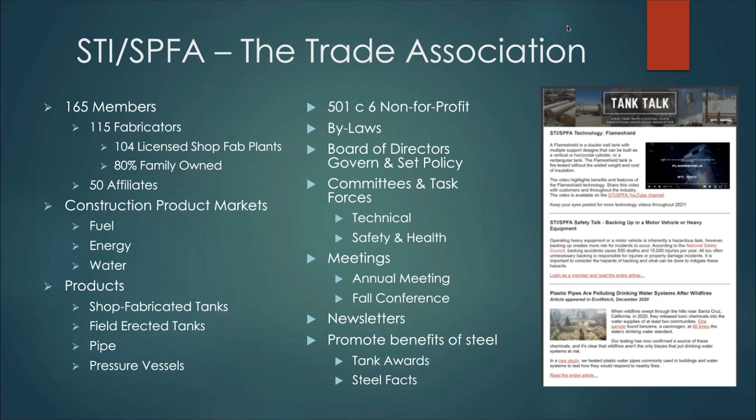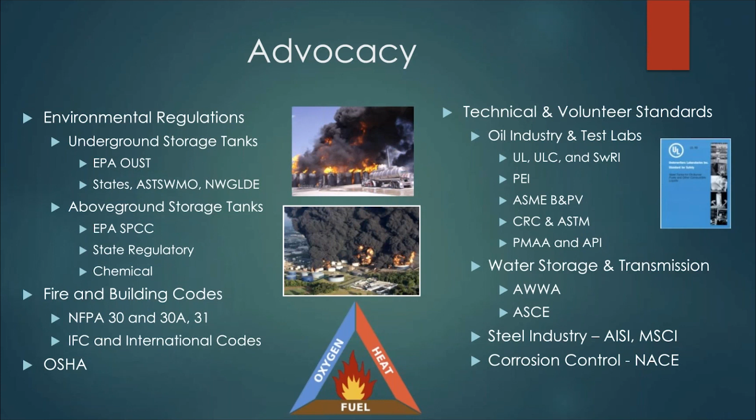Their customers are from a number of different industries, including petrochemical, power generation, food, pharmaceutical, fuels, wastewater, and water transmission industries. STI-SPFA is recognized for its industry advocacy. Our members and committees participate in and work with several federal and state regulatory agencies such as the EPA, the National Fire Protection Association, and OSHA. We also maintain relationships with other industry and related organizations, including API, PEI, ASTM, AISI, and MSCI.

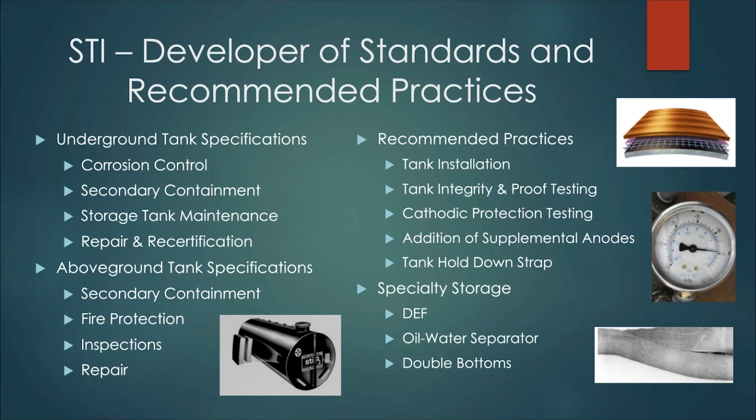STI-SPFA members contribute to several industry standards. Our members are actively engaged in the development of underground and above-ground tank specifications and recommended practices for installation, integrity, and testing. STI-SPFA is a hub for resources for our members, their customers, and the industry at large. Through our website, steeltank.com, we provide valuable information and keep our members up to date on the latest industry news, trends, and technologies. The association provides steel fact sheets and other beneficial information to demonstrate the strength, sustainability, and compatibility of steel.

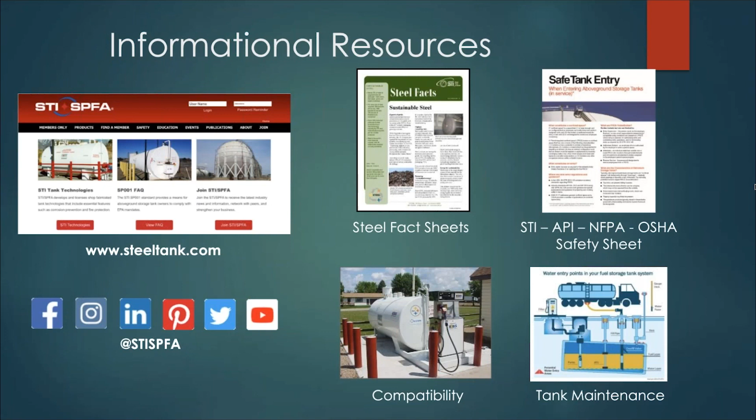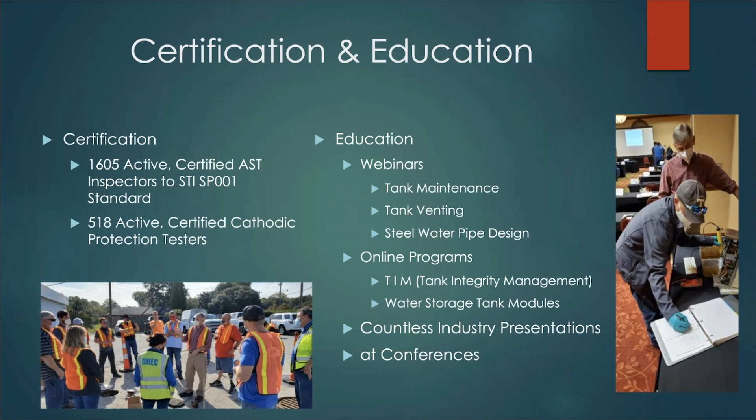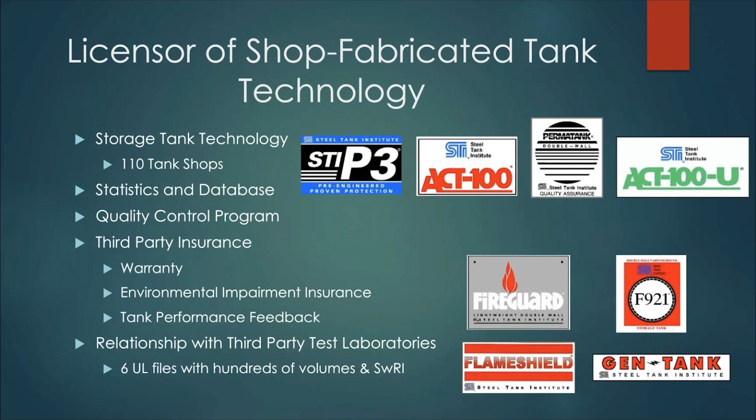STI-SPFA is the recognized source for training and certification in SP001 and cathodic protection. Recognizing that all tanks require ongoing maintenance, STI-SPFA also provides education on tank maintenance, including an online certificate in tank integrity management. STI-SPFA develops, licenses, and updates shop fabricated tank technologies for both underground and above ground storage tanks. Technologies include essential functions such as corrosion prevention, secondary containment, monitoring capacity, and fire protection.

Member fabricators of our licensed tank technologies are subject to periodic unannounced inspections by a team of STI-SPFA quality control inspectors. These inspectors conduct a rigorous investigation of the manufacturing function at tank fabricator facilities to ensure that companies are complying with the standards and specifications for manufacturing each licensed technology. Each member fabricator making STI tanks is required to send at least one representative to our biennial quality control meeting. Today, over 100 STI shop fabricated tank facilities are inspected, with an average of 5 STI technologies licensed per shop. More than 450,000 tanks have been built to STI specifications.

STI-SPFA members' customers are assured of the highest quality in the manufacturing of Steel Tank Institute licensed tank technologies from the Quality Control Program. STI-SPFA has also conducted several research studies and developed technical papers on a variety of topics, including tank design, steel compatibility with various fuels, including ethanol and biodiesel, and corrosion prevention and cathodic protection testing. Additionally, STI-SPFA has designed software and spreadsheets to address structural concerns and provide engineering calculations.

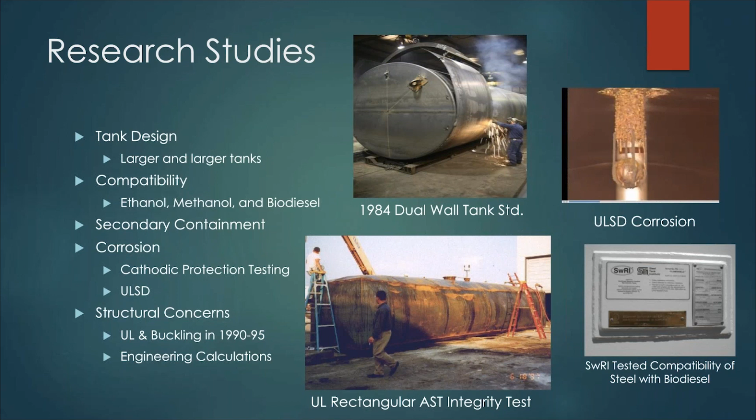I'd like to introduce you to our presenters. Wayne Geyer, who served as Executive Vice President of STI-SPFA for over 30 years. Steve Pollack, STI-SPFA's Director of Technical Services. And Joe Menser, STI-SPFA's Standards Engineer. Without further ado, Wayne Geyer will kick off our discussion on the history of underground storage tanks.

Thank you, Tim. The history of underground storage tanks goes back quite a few years. Just to get a little better background, oil was discovered back in 1859, and the first code requirements were in 1904, which was the predecessor to the NFPA 30 flammable combustible liquid codes as we know today. In 1916, the Steel Tank Institute was formed. The letter you see there with the heading Kewanee Boiler Company is a letter shared by a number of fabricators in the Midwest that decided to form the Steel Tank Institute. Two of those companies are still in existence today and are still members of the Steel Tank Institute: the Chicago Boiler Works, now called the Chicago Boiler Company, in a suburb of Chicago, and Morrison Brothers in Dubuque, Iowa.

The American Petroleum Institute formed 3 years after STI, and then the first formation of standards for steel storage tanks storing flammable combustible liquids occurred with the Underwriters Laboratories UL 142 standard in 1922. That means we're at 99 years for that standard. And in 1925, the first standard for underground steel storage tanks for flammable combustible liquids was developed in the UL 58 standard. Then you see about 40 years before further standards came upon the scene, and this dealt with corrosion control for underground tanks.

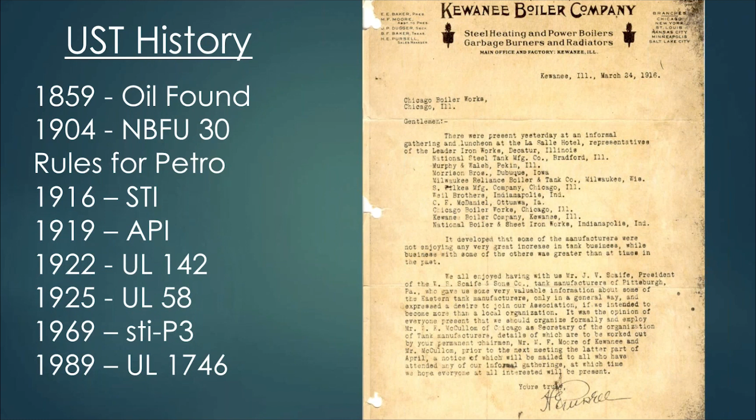In 1969, the Steel Tank Institute, through 9 fabricators, formed the STI P3 underground storage tank standard, which we'll be talking about in a little bit. And then 20 years after that, 1 year after EPA promulgated regulations for underground storage tanks, UL published their 1746 standard for corrosion protection of underground steel storage tanks.

It's also important when we consider the history with the development of standards for underground storage tanks to be aware of some of the other technological developments that were taking place. First, let's go back to why all of a sudden there was the need for storage of petroleum, petrol, fuel oil, gas, whatever you want to call it, in the early 1900s.

Lincoln Electric invented the first welding machine in 1907, when we look just at the welding history. And interestingly enough, the Model T that Ford created was built from 1908 to 1927, and there were about 15 million of those built. But it's basically a luxury type vehicle that basically the rich could afford. It was not a commodity yet at that point.

The welding further developed. The first pipeline got put together in Oklahoma in 1914. The American Welding Society formed in 1919. Various electrodes developed in the 1920s. The boiler and pressure vessel code in 1925. And a real popular weld procedure, submerged arc, 1930.

The point of all this is there was welding in the early 1900s, but it really did not advance where it could be used to build production for storage tanks until some 20-some years later, 1930s. 1920s was the UL standard. And then there were further developments, as you see there, in the 30s and 40s.

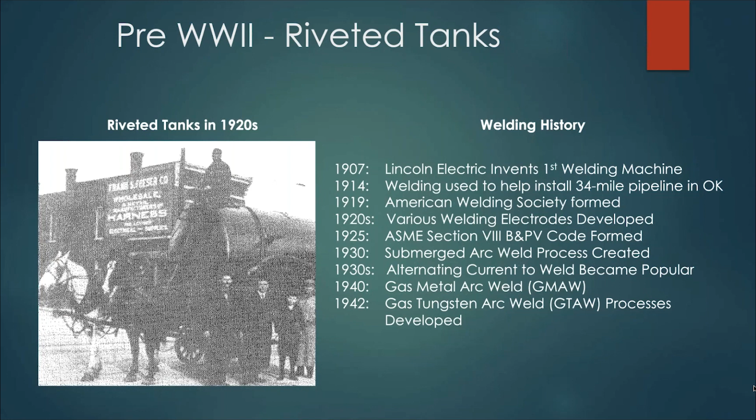When I go back in the Steel Tank Institute files, I really don't see a lot of further standardization until the 1950s. And the Midwest 56 standard was a standard built and developed by both the steel tank fabricators and the oil companies. They wanted to standardize the size of the fittings on an underground tank and the location of those fittings so that things like fill lines, vent lines, and so forth could be connected and standardized at the petrol stations that were popping up all over the country at that time after World War II.

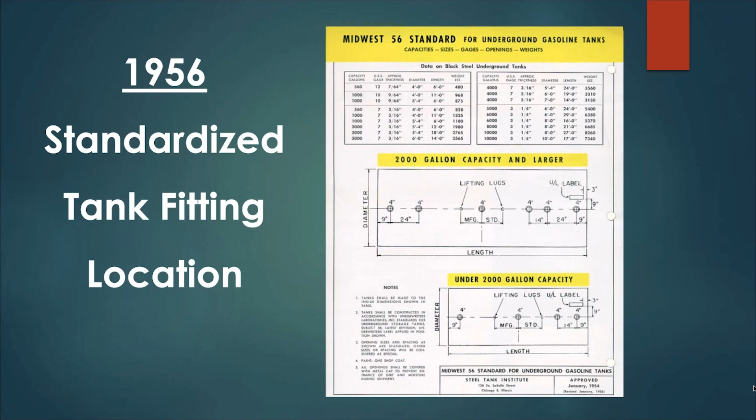You can see there that the tank sizes were pretty small by today's standards. Today we might see underground tanks of 20,000 gallons, 30,000 gallons being put in, some with compartments. Back then, 2,000 gallon, 4,000 gallon was a popular size.

In the 1960s, this was still before the environmental movement, the oil companies started experiencing corrosion from steel storage tanks being put in the ground which did not have corrosion protection. At that same time in the 60s, the oil companies were looking at it more as money out of their pocket, their inventory, and as I said before, it wasn't an environmental issue as it is today. So there were a number of efforts being made by the steel tank industry as well as the oil companies to find tanks that could go in the ground that were corrosion resistant.

One of those studies was with a non-metallic fiberglass structural tank that Owens Corning was developing. The steel industry experimented with a couple things. One was just a plastic baggie that you can see here in this photo. This photo is in the 60s. You can see the very, very sophisticated joining technique, that duct tape there.

This was apparently before OSHA rules were too evident, because that fellow there almost looks like he has a cigarette in his mouth. It's pretty darn tight between the wall of the excavation and the tank, and the other fellow is laying across the tank. Clearly not acceptable installation standards today. But believe it or not, some of those baggie tanks actually came out of the ground in the 80s and 90s, and where there was not much groundwater around and the tape was sealing that plastic, it did a nice job of providing corrosion protection.

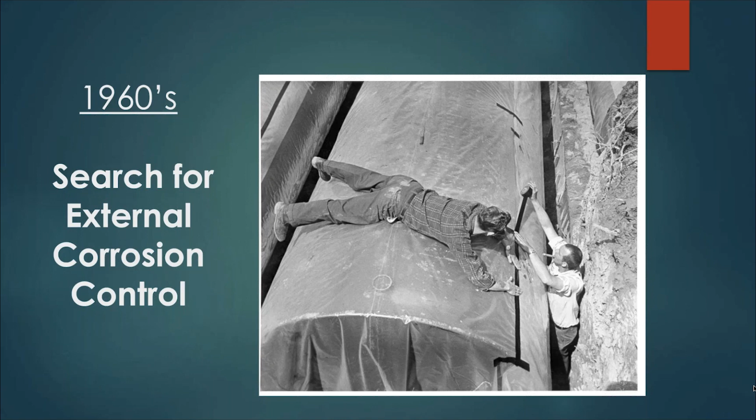Now, there are not too many of them because the tape generally didn't last that long. But there was a company in Michigan in those days, and they actually commercialized and sold a package called Polywrap, or a polyethylene wrap over the tank, as you see there.

There were a couple other systems that the Steel Tank Institute and its members were investigating. One was use of FRP coatings. As I said before, Owens Corning was developing a fiberglass tank, and the steel industry thought, well, maybe we can use that FRP, fiberglass reinforced plastic, as a coating. This was actually a standard developed by STI called STI-LIFE back in 1968, and it was actually the first technology where STI had a labeling system that was applied on the tank. You can see there the demonstration with a sledgehammer to show the coating was pretty tough.

And some fabricators stuck with the fiberglassing for the next couple decades before a new standard came out called the ACT-100. But putting a fiberglass coated tank together was not easy. There was a lot of hand-applied requirements. The aesthetics weren't necessarily great, and the cost was great.

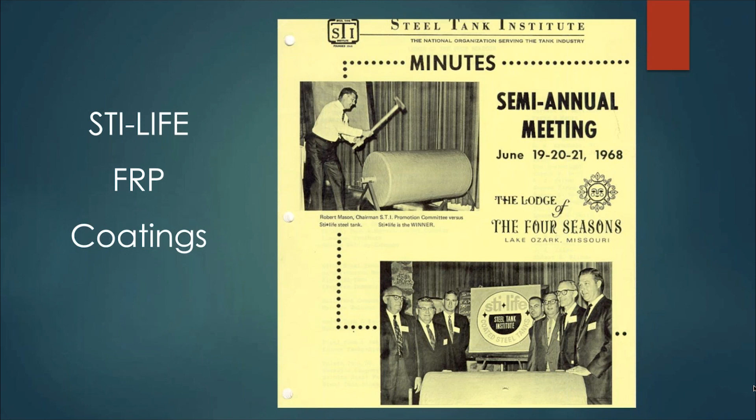So one other system that was being tested was a cathodically protected system. And this system was called the STI P3, where P stood for the word proven protection in 3 ways. The 3 ways were through a dielectric coating, a magnesium anode, and separation between the steel tank and steel pipe through something like a nylon bushing, where the steel pipe and steel tank didn't touch one another.

I talked about the development of welding through the years. One of the big advancements that allowed the STI P3 tank to become successful was with coatings. Up until this time, underground tanks were just coated with a primer, asphaltum coating, that was basically to prevent the tank from corroding while it was being shipped or stored in the yard or stored at the job site before it went in the ground. People didn't really understand that groundwater and soil could have a corrosive effect on steel.

As coatings progressed, that soon got replaced with the STI P3, which necessitated the use of a high-tech coating at that point called coal tar epoxy. Later, that coal tar epoxy became replaced by another coating in the early 80s called polyurethane, which was a much more productive tank coating to be applied because it could be applied and cured in an hour, where coal tar epoxy took maybe a day for it to harden up, and there were also some solvents in it.

You see here the STI P3 tank was being shown to some potential buyers who were learning how a steel tank could be prevented from corrosion through this great system called the STI P3. At that time, a standard was created in 1969 with the first tanks in 1970. As I said before, 9 companies and 9 fabricators started promoting it.

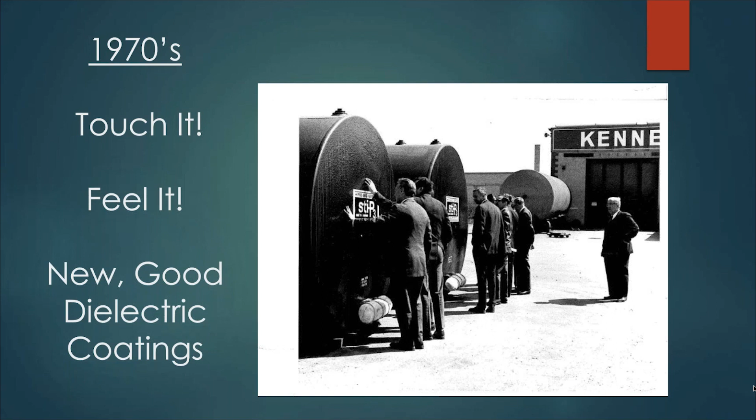The oil companies wanted a national effort on this, so the Steel Tank Institute agreed to take it over and apply a 20-year warranty to it as requested by the oil companies. And the system had a labeling process and an inspection process, which STI did to verify the tank met the standard. You'll see some more pictures here, and rather than myself go into detail, I'm going to turn this over to Steve Pollack, the Director of Technical Services for Steel Tank Institute.

Thank you so much, Wayne. I appreciate the history leading up to these tanks, and what I'll talk about from here on is a bit about what you mentioned, the 1988 promulgated federal regulations and the designs that go in to meet these. As Wayne mentioned, the tank construction was modernized, coatings became modernized. This slide lets you know that, again, you're looking at the three ways of protection there.

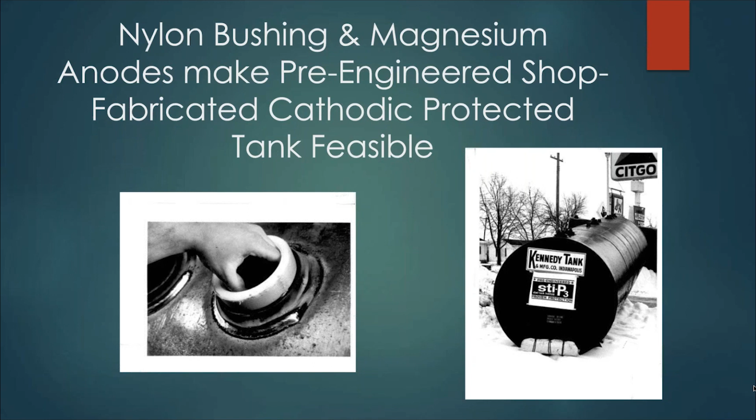There's a coating on the tank, there's sacrificial anodes, and you can see the installation of a nylon bushing into the top fittings. Those are important for making sure that any of the other tank appurtenances on top do not short out the tank and basically have the sacrificial anode trying to protect more steel if somebody connects a steel vent pipe or previously steel piping or is connected to a submersible pump. So nylon bushings are a very important part of that isolation.

More innovations were encountered over the years, and we're very proud of what we worked on. In 1979, cathodic protection test stations were developed. You may have come across these out in the field and heard references to PP3 or PP4 test stations.

The idea was to make the testing simpler for owners, even with the voltmeter and having that connection to the steel of the tank and a buried reference cell. Wayne had mentioned the urethane coatings. Those came on in 1981 and were an important aspect of improving on our coating systems.

One of the things that did come about based on installer experience was that it became important to weld the anodes onto the tanks. The anodes used to be shipped separately, and part of the installation instructions required that the person in the field had to wire the tanks on, attach the anodes onto the tanks, and that was not being done consistently. So we decided that welding the anodes on was a better development.

In 1984, we also looked at dual wall technology, and double wall tanks with interstitial monitoring was developed. And Wayne mentioned another coating development too. We did look at FRP coatings on these tanks. So as secondary containment was developed, and of course now we know that secondary containment is the rule of the land based on the 2005 Energy Act and the regulations that were promulgated in 2015, but double-walled tanks have been around for a long time.

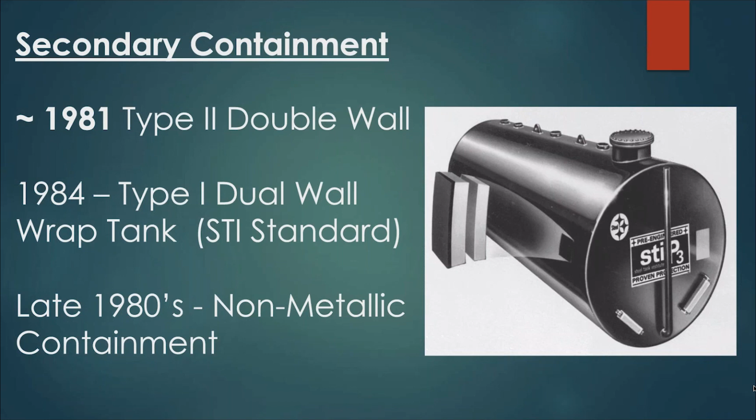Europe had been working with a technique that was more of 100% containment instead of 110, and was an intimate marriage of the secondary wall to the primary wall. The Type 1 tanks came through and were adopted in the mid-80s, 1984. We were working with a Type 1 dual wall wrap tank, and that fits STI standard as well as UL standards. In the late 80s, of course, we started working with jacketed tanks, and that became part of what we work with more now. We'll look at that at the next slide.

One of the other components that we looked at in the mid 80s as a unique addition to these tanks was fitting all of the fittings into one containment sump. And you can see there's a P3 tank with a collar around all the fittings, and what you might not be able to see is that collar is coated. And of course, the rest of that containment sump has to come up to grade.

Again, we're talking about preventing corrosion with coatings and anodes and with isolation. So to complete that containment sump up to grade, we still had to include an isolation around that collar and isolating link seals to connect what would be the rest of a steel sump all the way up to the top of the grade of the tank. Now, plastic sumps and fiberglass sumps came out a little bit later. These steel containment sumps were obviously heavy and hard to work with. You probably won't run into these very often, but that was one of the unique innovations that we looked at in the mid-80s.

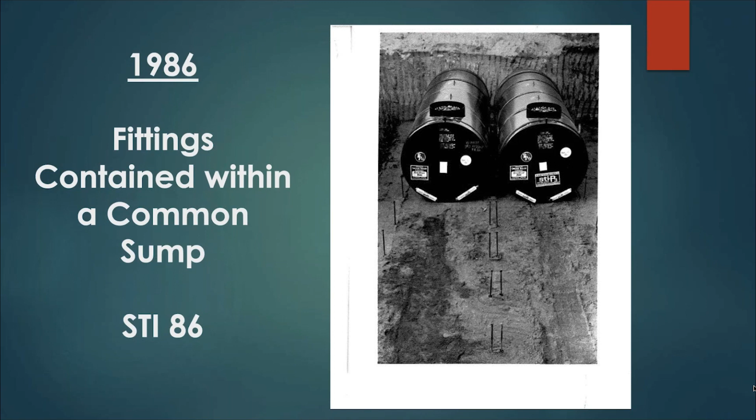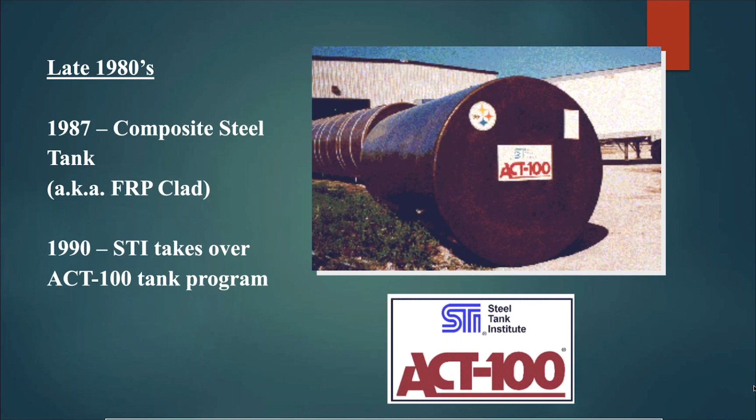The formal notion of a composite tank came with manufacturers who developed the Association of Composite Tanks and developed what we know as the ACT-100 tank. Most of those members of ACT were also Steel Tank Institute members. And after that, the ACT FRP clad tank was developed formally in 1987. STI took over that technology in 1990, and the ACT-100 tanks are still produced today.

So in 1991, the next development was an FRP jacketed tank. You may see these as our Permatank technology. Again, this is a tank that, even though it's from the 1990s, is acceptable even now as our secondary containment rules take place across the nation. This is a steel tank with a close to intimate wrap fiberglass material sprayed on, and that allows for interstitial monitoring of the interstitial space. And this has been one of our more successful tanks and produced across the nation and the world.

Our standards engineer, Joe Mentzer, is going to talk about above ground storage tanks in the next session. Thank you, Steve. We've been discussing underground tanks, and we can also include above ground tanks in this discussion. Above ground tanks actually predate the underground units. However, they were limited in use due to regulations that require them to be separated from people's residences, and also the requirements to provide containment caused problems. But in the early 1990s, some design options became available that addressed those.

One of those was the creation of a double wall tank using similar technology as with the underground tank, but that double wall tank system provided the necessary secondary containment for the tank system. And then the next one was the introduction of insulated tanks, or tanks that had an insulation system incorporated in them that allowed them to be placed closer to people or businesses because the tanks could withstand some minimal exposure to heat. This increased opportunities to use above ground tanks, and there was sort of a feeling among the industry to get away from some underground tanks due to some earlier problems.

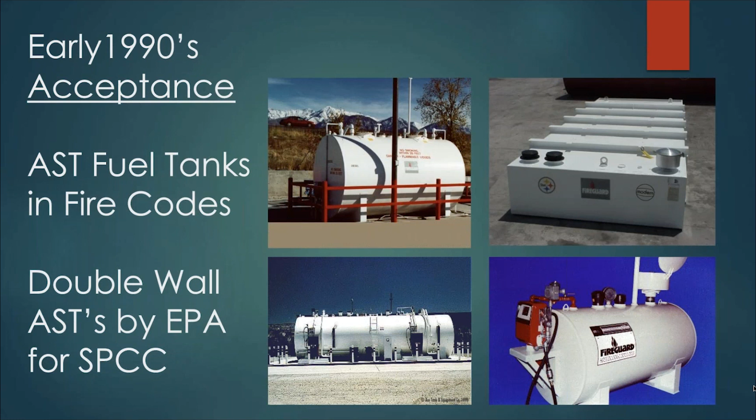The double wall design addresses the secondary containment requirements for the underground tanks. Steve mentioned there are federal laws that require those. Likewise, for above ground tanks, the federal code called the SPCC standard requires secondary containment for storage tanks. We've learned over the years too that steel tanks especially have excellent compatibility with biofuels and the new fuels being introduced. History has shown that steel can hold up fairly well to all of the materials that people have included in motor fuels. And we've also learned over the years, proper tank maintenance means tanks that operate as the owners want them to and operate reliably and safely store the product that's in them so that it's available when needed.

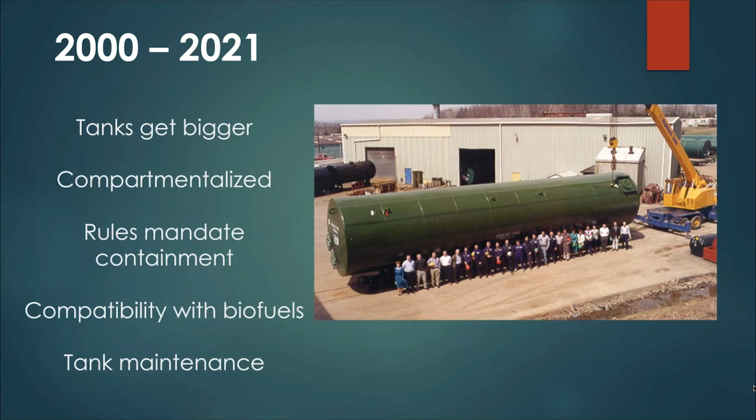For issues of discussion, these are things that often come up when we talk to people about tanks. And let me just hit them briefly.

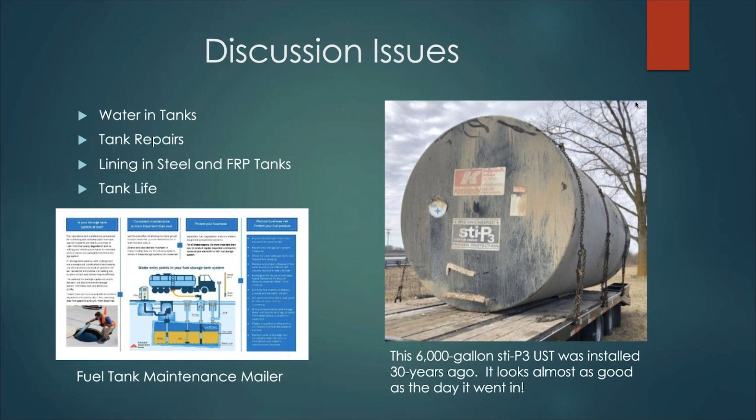As far as tank life goes, steel tanks have been in operation, especially above ground, since the turn of the century. I can point to tanks built in the 1930s that are still in operation today. Those are above ground tanks. But even the underground tanks, when they're properly maintained and properly operated, they've operated 30 years successfully, and we don't see an end to their life as of yet.